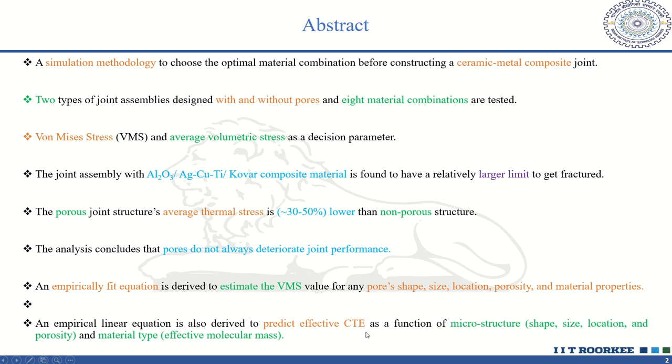An empirical fit equation is derived to estimate VMS value for any combination of pore shape, size, location, porosity, and material properties. An empirical linear equation is also derived to predict the effective CTE of the joint as a function of microstructure and material properties.

So, in this study, 8 material combinations are tested with two joint assembly designs JA1 and JA2. The thermal stress analysis is performed for heating these joint assemblies from 300 Kelvin to 1200 Kelvin, and then the analysis performed for both porous and non-porous joint assemblies, and then stress and strain parameters are estimated and the optimal material combination corresponding to minimum stress value is estimated, and then the analysis is repeated for different pore content,

that is pore shape, size, and location in the braze interlayer of the joint assembly are varied, and the effect of different pore content is estimated, and then the optimal combination of pore shape, size, and location are derived, and then an empirical non-linear equation to predict VMS and CTE as a function of microstructure parameters are derived.

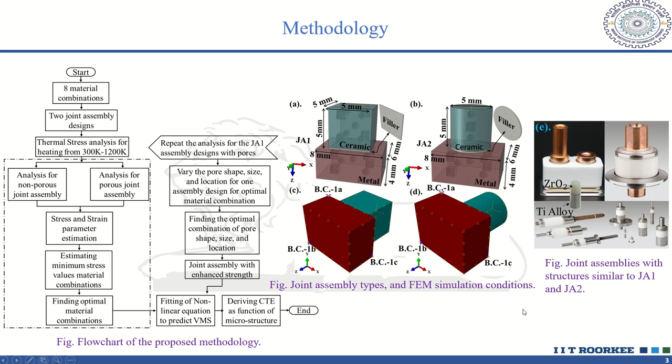This figure shows the two types of the joint assembly JA1 and JA2. The pore distribution is also shown here. The encastre boundary condition and fixed displacement and rotation are used as the joint assemblies are fixed in the operation. The design of the two joint assemblies is chosen similar to the joint assemblies used in real world application for aerospace and automotive industries.

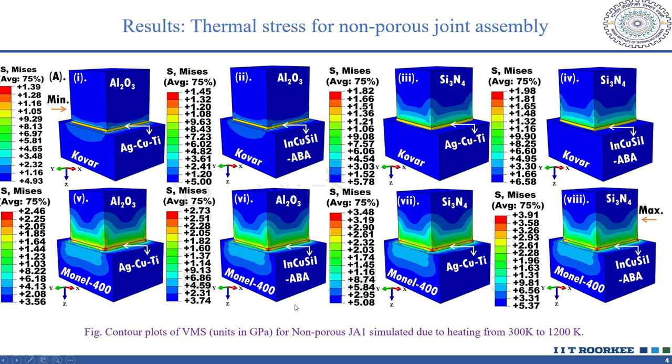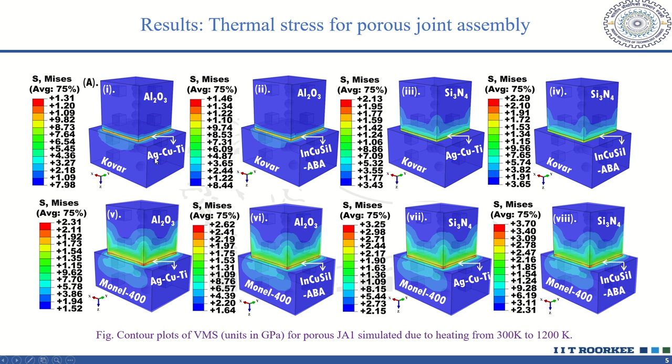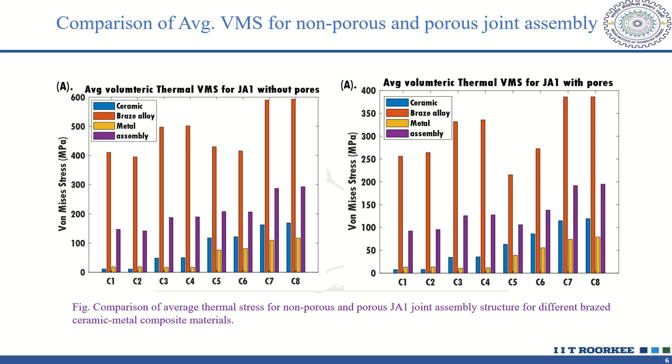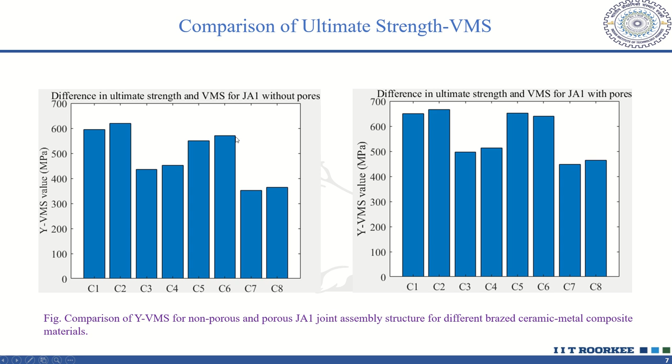And then the comparison between the ultimate tensile strength of different material combinations and the von Mises stress is estimated and plotted. It is found that the difference is highest for the C1 and C2 material combination than the other C3, C4, C5, C6, C7, C8 material combinations. This is because these materials possess the lower von Mises stress, so they can bear thermal stress to higher ranges, and so these can be used for higher temperature applications.

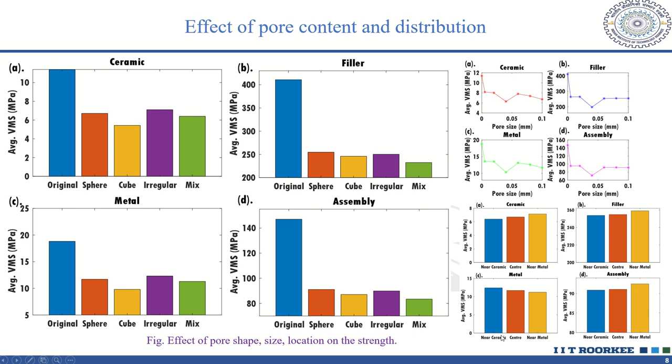Firstly, these are distributed near the ceramic material interface, then at the center of the joint assembly, and then near the metal of the joint assembly. And it is found that the near ceramic location possesses lower average thermal stress, meaning these can bear higher ranges of thermal stress, and so these can be used. So, as we found, the joint assembly containing mixed shaped pores of 0.04 mm size and present near the ceramic material interface can be used.

And after that, an empirical equation for von Mises stress prediction is derived from the simulation data, and a nonlinear polynomial equation is fitted. The equation is fitted using the polynomial regression AI model, and it is found that the prediction of this fitted equation is linear, and this equation can be used to predict the von Mises stress as a function of volume of the pore, size of the pore, location of the pore, total porosity content, and effective molecular mass, which is a material property of the joint assembly.

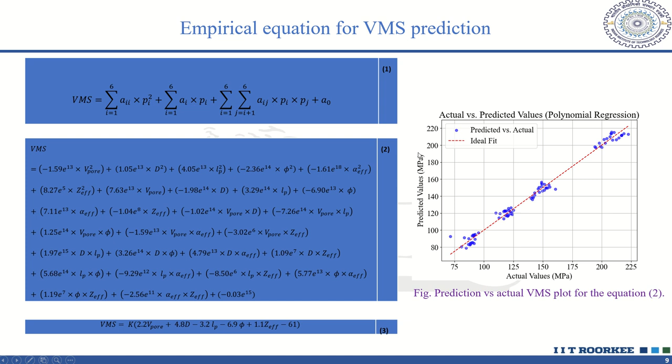And then a linear equation is also derived for VMS by neglecting the higher order degree parameters. And then these two equations, 2 and 3, are equated to derive the equation for the effective CT parameter of the joint. Equation 5 presents the derived empirical linear equation for effective CT parameter. This equation predicts the effective CT of a brazed ceramic metal joint assembly.

The parameters which affect it are volume or shape of the pore, size, location, total porosity content in the braze or joint interface region, and the effective atomic number of the joint assembly. The values of different coefficients are listed in table 4, along with the units. And then the CT parameter for some random combinations is predicted, and it is found that the difference between the actual and predicted effective CT value is between 10 to 12%.

So we can conclude that a composite sample can be scanned using a non-destructive technique to give the microstructure properties, that is pore shape, size, location and total porosity content, given its constituent materials. So one may predict the VMS and effective CT using these empirically derived equations and information from the NDT without putting the sample under thermal stress, destroying it or reducing its overall operational age. One may also optimize the combination of the constituent materials for the brazing technique even before the sample is used.